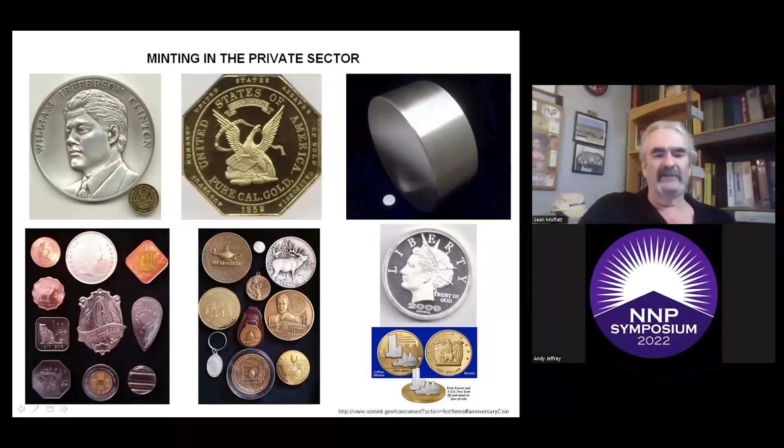Let's go back and take a look at minting. Minting is basically melting and smashing of metal, but under controlled circumstances you can produce items to facilitate commerce, which are your circulating coins. You have surrogate items for commerce, which are your tokens and jetons. You have items to store wealth, which are your bullion rounds and bars, and objects of art, honor, commemoratives, which are your medals and medallions, as well as pretty much anything else that can be made by the minting process.

In about 2600 years, since coins were first minted in ancient Lydia, the basic process has not changed. What has changed is the technology has improved, the processes to where we get consistent alloy sizes and quality, and that's on your good days. But since the very beginning of minting, bad day events happen every day in every mint all around the world.

So let's start at the very beginning, coin material. The modern coin materials follow certain processes before they can be made into blanks or planchets, for numismatically inclined. The metal elements need to be refined to pure. The pure elements are then mixed or alloyed with each other per specifications, and then they're tested to make sure they're the right composition. Then the specified metal is cast into a semi-finished usable shape, and in the end, the metal will be processed to become a finished strip.

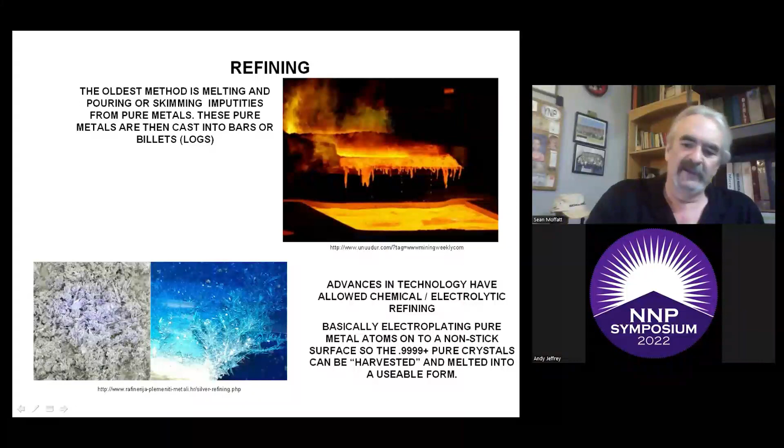So refining, the oldest method is melting and pouring or skimming off your impurities from the pure metals. These pure metals are then cast in bars or billets or logs, as you want to call them. Advances in technology have allowed chemical and electrolytic refining, basically electroplating pure metal atoms onto a nonstick surface like carbon or graphite, so that 99.99% pure crystals can be harvested and melted into a usable form.

Now, alloying is melting different types of pure elements together to create specific properties in the finished metal, and this is real important for counterfeit detecting. At least in the modern era, where we have discriminators on your vending machines and things like that that can sniff out ones that are not made with the proper materials.

Your base metals, which are copper, nickel, zinc, steel, etc., are alloyed and produced by absolute tons, megatons, we call it. Your precious metals are done in much smaller batches under much tighter quality control, but still these are produced by the tons, just not as many as your base metals.

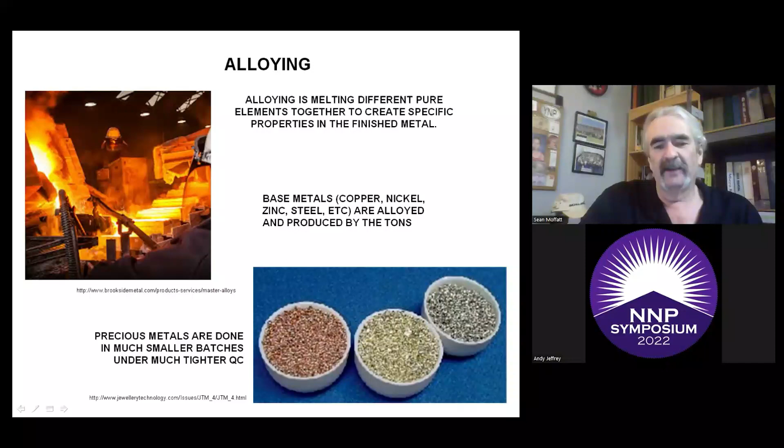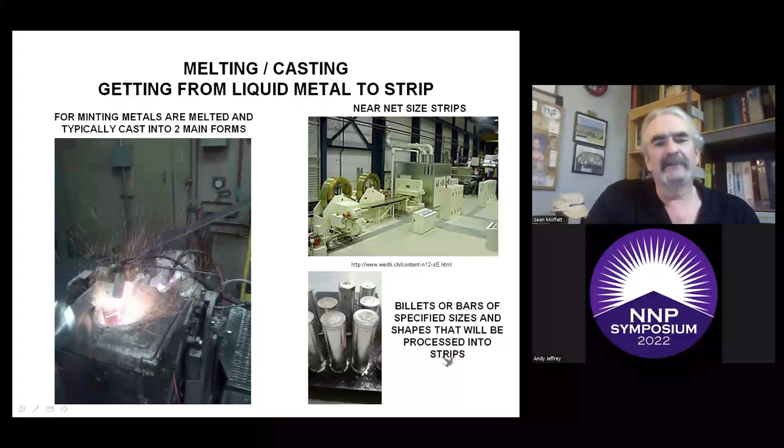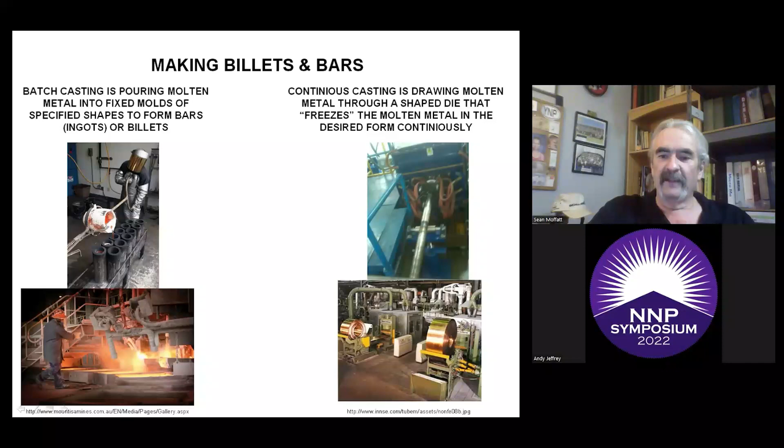So it can come out in bars, you can come out in squares, or down here you can see they come out in strips, which are then coiled up for further processing.

And a kind of newer technology I just want to touch base on is your sintered metal. It's basically, you can make near net shaped blanks, which are close to the final shape of the coin or the medal that you're making. And so this allows for a process that's called smart minting. It allows for really high relief and just odd shapes to be minted.

A pre-weighed amount of the metal powder is mixed with binders to make the powder stick together. That powder is put into a forming die and is compressed and formed into a part that is then heated, and that causes the binders to burn off. Then the solid pure metal, which is near the net shape of the finished part, is left and ready for polishing and other processing before coining. We'll touch on this process a little bit later.

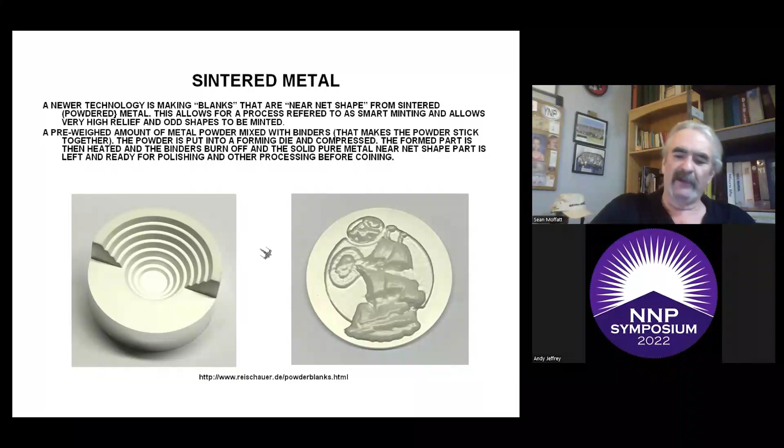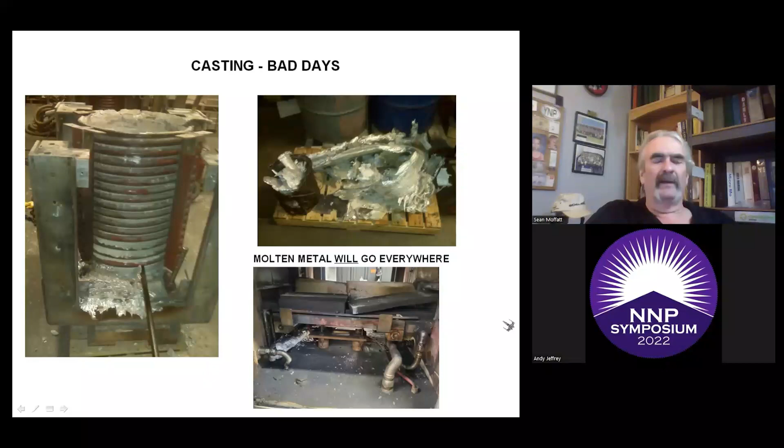And this one here is a bar casting machine that had a train wreck on the inside. You can't really see it well, but down under here, when the mold broke inside the heating chamber, all the metal just poured out, and you see little BBs of silver laying all over the place. So molten metal will just go, like I said, absolutely everywhere and make an awful mess.

Now we're going to go on to extrusion. Extrusion is pressing a heated billet of metal through a heated die with the desired shape and size, and the metal is typically squeezed into a strip.

So you need to think of an extrusion press as a 400+ ton Play-Doh spaghetti maker. I think y'all remember those as kids. You sit there, put the Play-Doh in the little chamber, squeeze the handle, and get little shapes of stars or moons or whatever came out. Well, the extrusion press works exactly the same way.

Extrusion is only usable on pure soft metals like your gold, silver, and aluminum. Now your coppers and nickels, they're too hard. They would work harden and you wouldn't be able to squeeze them. So here's how the whole process works.

You take a heated billet of metal. This one here is a pure silver billet, and you put it into a heated container. Then you have this big rod right here, called a stem, and you push that billet into there, and it's up against the die, which is in the front part of the machine. Then you apply your hundreds of tons worth of pressure, and it's squeezed out.

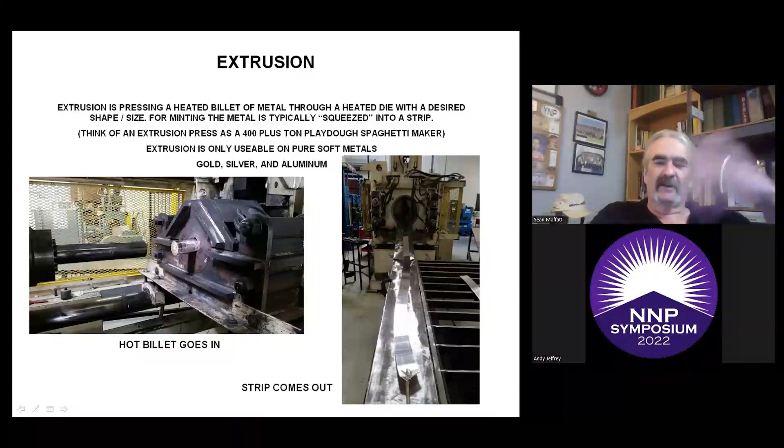That billet, which is about 12 inches long and weighs almost 500 ounces, will make about a 15 to 20 foot long strip, depending on what size you're squeezing. So when it comes out, it's all nice, pretty strip. It gets cut off in the machine, you pull it out, and you put it on a cooling table.

Now, depending on what the chunk of stuff is that came out of melting, if it's a piece of silicon carbide refractory material, or mud as they call it, it can actually damage the die, and that will leave a big line or a strip all the way down your strips, so you just waste that entire strip. It has to be melted. And if you don't waste it and send it through the process, that line or whatever the defect is can show up on your finished coins.

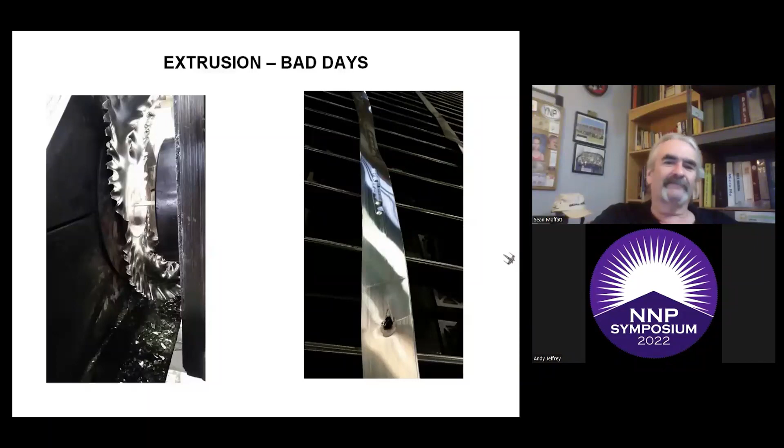Now we're going to move into rolling. Once you have your basic strips, either from the continuous caster and coils, or if you extruded them, you get them rolled down to the right thickness.

You're passing your strip through a pair of rolls that are turning, and what you're doing is reducing the thickness of your strip. Interestingly enough, the strip doesn't really get wider, it just gets longer. So you can have a 5-foot piece of strip, and if you're going to reduce it down 50%, that strip's going to end up being almost 10 feet long by the time you're done.

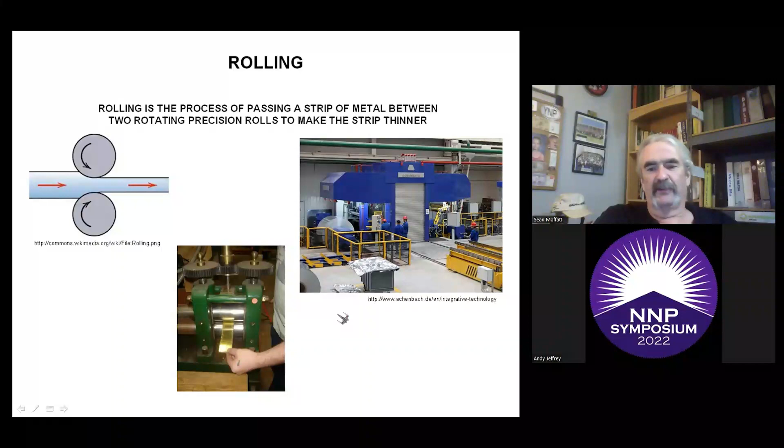Now, these rolling mills come in many different shapes and sizes. Here's basically a little bench top model, and here's just a big massive rolling mill for doing large pieces of strip. Now, another form of rolling is called cladding, where you take several strips and feed them through a cladding rolling mill, and they're all squeezed together to make a single strip.

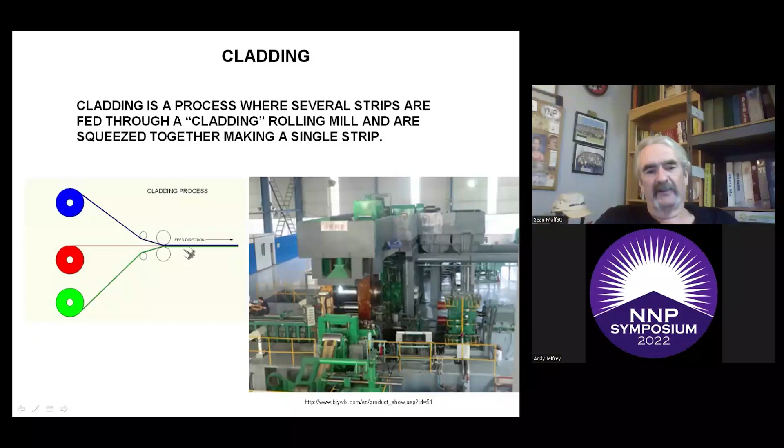So if you look at a brand new US quarter and look at the edge of it, it has a copper center, but the surfaces are both the copper-nickel silver color. So if you look here, these will both be the copper-nickel thin layers, and this here's your copper center layer.

Hey, Sean. Oh, I gotta go. There's all kinds of wrecks going on here.

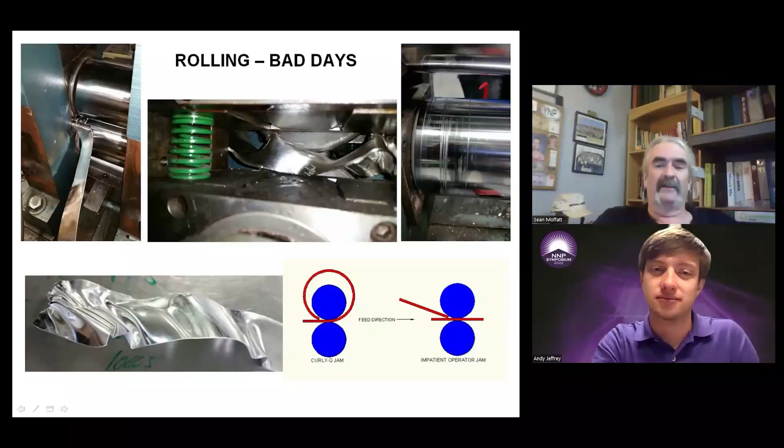You basically turn it into a piece of ribbon candy, folding up on itself and making a mess. And they get jammed up. The operator didn't feed this one in straight and it went sideways going in there. You see the mess it got into. We have to pull the whole mill apart to get this cleaned out.

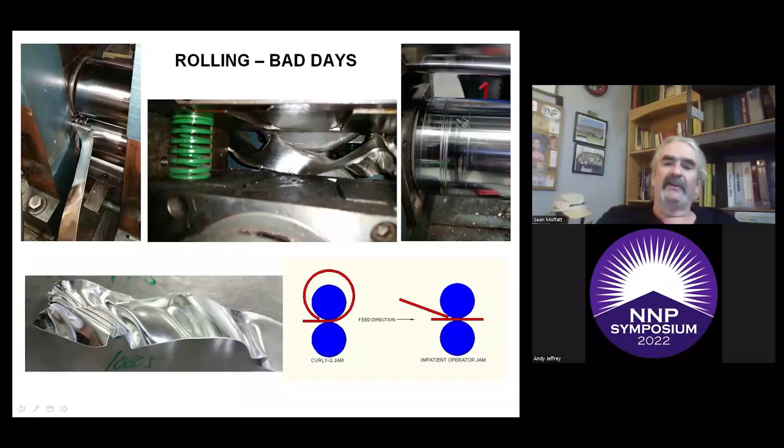And then if you have damage on your rolls, feed something in, it jams up, there's something on your strip, like garbage stuck in it from when you cast the strip, it can sit there and damage the roll. These two rolls have to be taken out, re-ground down, get rid of all these grooves, and repolished. If you ran strip through this with these grooves on here, that groove is going to be on your strip, and if you didn't take care of it, it's going to end up on your finished coin.

And just the same way, if you get a piece of schmutz or yuck that lands on your roll and you go around, it's going to sit there and squeeze an image of that garbage into your strip. Now interestingly, it applies Murphy's Law when you do this, and that piece of yuck won't stick to the strip.

We also have different types of jams which can cause damage to your rolls and rolling mills. I call this one a curly Q jam, where the strip kind of comes up and comes around, goes back in, and feeds back on top of itself. Fortunately, a lot of rolling mills have overload clutches or shear pins on the drives, and when that happens, those blow up, and you don't actually break your rolls or the shafts on the rolls.

But it does happen. And then this one here I like to call the impatient operator jam, where the operator's not paying attention and feeds the next strip in too fast on top of the previous strip, and boom, then you blow up your rolling mill again.

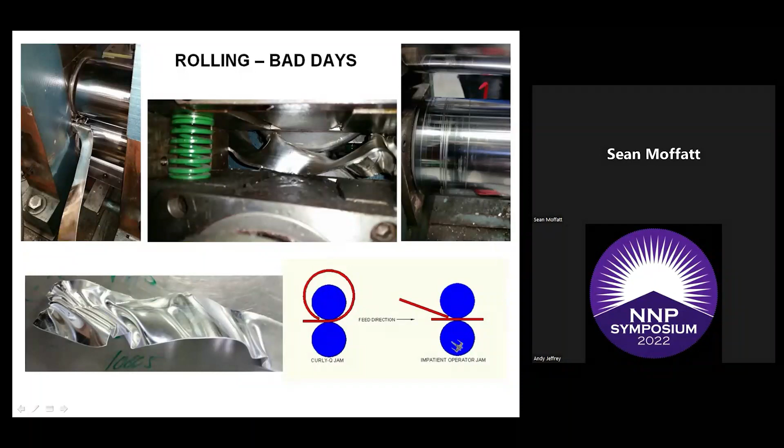So after rolling, we have other strip processing that can be done. We can have annealing if we need to soften the strip, because the rolling of the strip work hardens it. We have slitting. Strips are normally produced like 24-inch or 48-inch wide strips, and if you need it to fit into a die set to make blanks, it only needs a 3-inch wide strip. Well, the strips are slit down to the proper size that you need, and there's also all kinds of cleaning and coiling up that needs to be done with the strips as well.

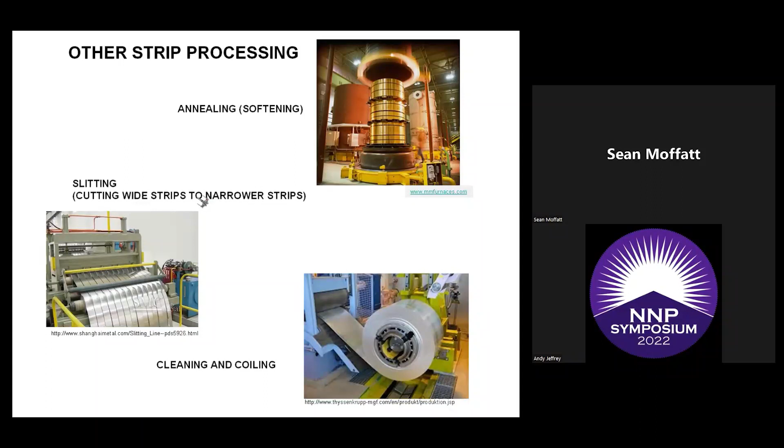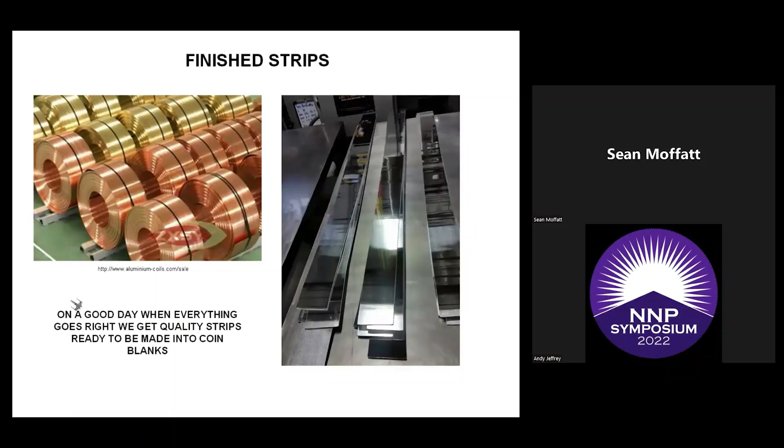So when we're all done, we have nice finished strips that are ready to be made into coin blanks. Here you have your base metals, all in coils, ready for automatic feeding through machines. Over here we have some nice finished polished silver strips ready to be made into those, probably for 1-ounce rounds. So on a good day, when everything goes right, we get good quality strips that are ready to be made into coin blanks.

Now, strips on the bad days. We've seen there are many processes to get strips ready to go, so we're going to look at some of the things that go wrong with strip processing. One of the banes of the blanking press operator are cambered and crown strips.

Camber occurs when one edge of the material is longer than the other, and it's most noticeable in narrow materials. The material curves off to one side in one direction, and it can even snake back and forth. If you were to take a strip that had a bad camber in it and started laying it out on the ground, like out in the parking lot, and uncoil the thing, it will eventually go around in a big circle.

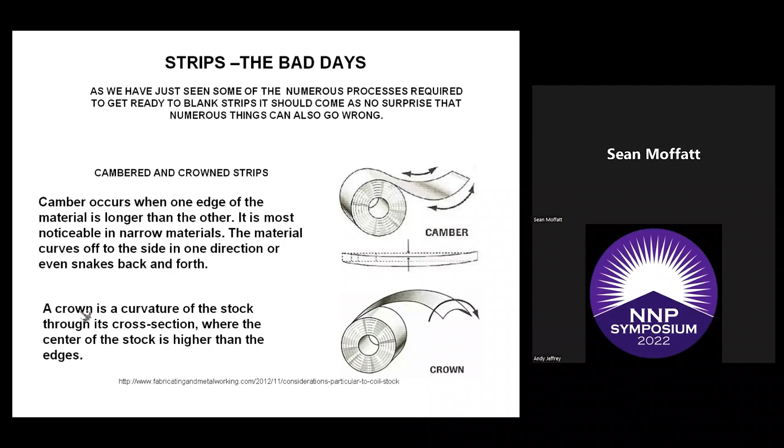And for a crown, there's a curvature in the stock that makes it thicker in the middle, for whatever reason, and that curve makes it tight to fit. We're going to discuss how this affects things later. You won't see this on a coin, but it can cause other problems later on, which can affect what the coin looks like.

We're going to go back to another bad day issue: we have laminations and bubbles. As was shown during extruding, when we had bubbles in the strip, those bubbles aren't noticed, and you sit there and further process it. The impurities in the metal can cause problems with the metal adhering, and the metal starts peeling apart.

As you can see right here in some of these brass blanks that were made, the metal just peels right apart. Here's a wonderful Mexico 50 centavos, where the eagle's wing pulled up. I put that string in there just so you can see the separation.

And here's an old German 10 pfennigs, a zinc unit that had impurities in it, and it all bubbled to the surface after the coin was made. So many times laminations, you won't be able to see them until further processing, when there are impurities underneath the surface. Now we're going to move on to blanking.

Blanking is a process where the strip is passed through a blanking tool. The tool has a plate known as a die with a hole or holes in it. It also has a punch or punches to match the number of holes in the die, just very slightly smaller than the hole in the die.

The strip is placed between the die and the punch, and the punch is then forced through the strip, punching a blank out of the strip. The strip is now stuck on the punch, so a stripper is used to pull the strip off the punch as the punch retreats from piercing the hole.

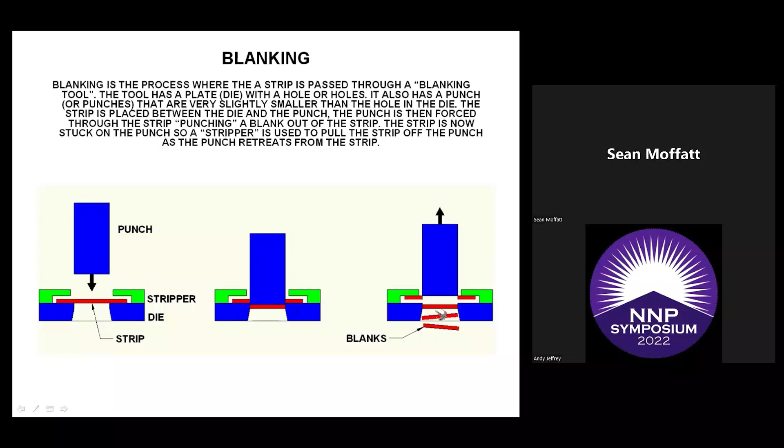So you can see right here we have our punch, and the strip is in between the punch and the die right here at the bottom. The punch comes down, it knocks out a piece of the strip into the die, which holds it there. Then as the punch retreats, it pulls the strip off of the punch via the stripper. As you keep piling up blanks down in the bottom of the die, they all start falling out and the blanks come out of the press.

There are many different ways to make blanks, many types you can make. I'm going to start with the very basic here. This is called a one-up strip, where you have one punch and one die, and you just make one blank at a time. You see how nice and tight, just a nice long strip. Whenever you want to have all the material as close as you can to the holes, you get the maximum amount of yield out of the strip you're using, so you have the minimal amount of scrap. This is a one-up strip.

This here is a two-up blanking tool, and the strip is pulled back out, so you can see how nice and tight all the holes are in the strip. We're punching this hole and this hole at the same time.

You can tell by the orientation of the punches and the holes in the stripper. This is a two-up strip, makes two blanks at a time. This is for 10-ounce silver rounds.

Here we have a four-up strip. We're making 4 blanks at a time. And again, you want to maximize the use of your strip right here.

This here was when I took a tour of the Osaka Mint in Japan. They were making 11 blanks at a time at about 500 strokes per minute, so about 5,500 blanks a minute off their press.

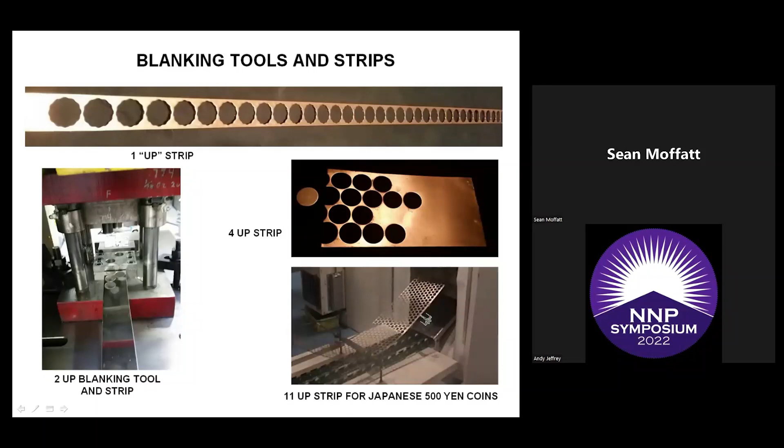With doing one-up tools, your best you can hope for is getting about a 70% yield out of your raw strip that comes in. Or if you go up from this and have many, with very thin webbing, you probably get just about an 80% yield, so you only have about 20% scrap.

So the final product of blanking is a rough blank, also known as Type 1 planchets for you numismatically minded, and we just call them unrimmed blanks most times.

I just wanted to show on the edge of the blank, you can see the impression occurring here from where the punch comes down and hits metal. And as the metal starts being pushed out of the strip, first the elasticity of the strip just kind of stretches, and that's where you get this shiny area down here around the bottom.

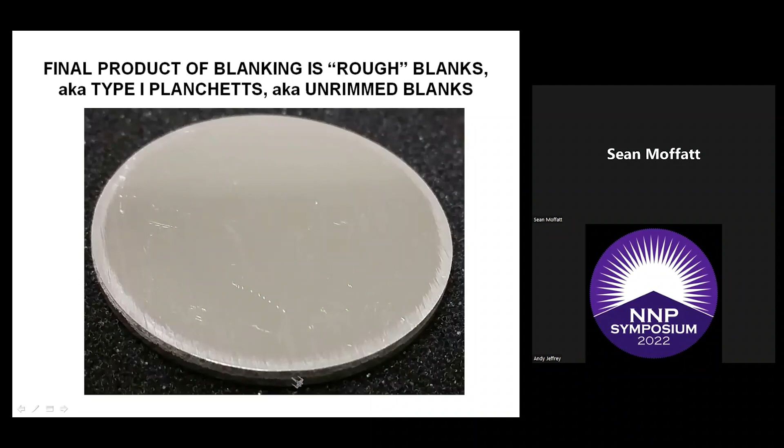But then once the pressure of the punch passes the yield strength of the material, it fractures and leaves this really rough edge all the way around. That's where it breaks, and that's where the blank gets knocked out of the strip completely.

Let's go talk blanking on the bad days. We're going to start with clips. Now, clips come from either the strip not feeding correctly in the blanking tool, or blanks getting back into the blanking tool, or running out of strip without stopping the press. So there's 3 main types of clips that we have.

You have an eclipsed clip, or what we refer to as the Pac-Man blanks. You have an elliptic clip, or a football blank. And then you have an end of strip, or what's known as a straight edge clip, which depending on the condition of the strip, it may not be straight edge, it may be all jaggedy. Whatever it is, it's the end of the strip, and you can't punch out a full blank.

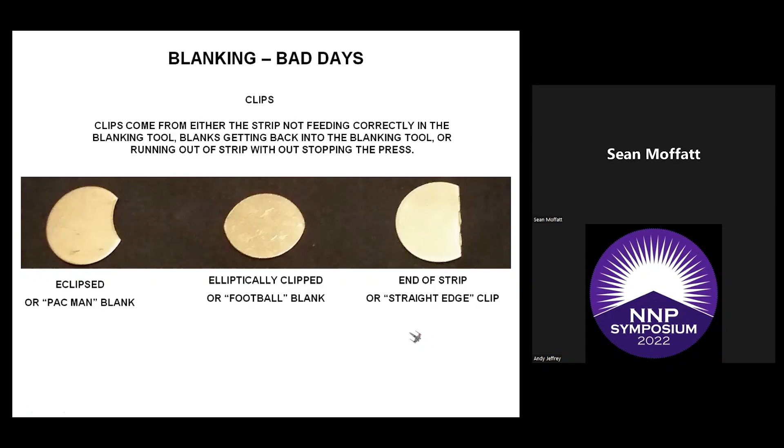Now, what may cause the strips not to feed is when we talked a little while ago about the cambered and the crown strips. When you set up a strip to feed through a blanking press, you want it to be nice and straight. It has to come off the decoiler and through a straightener, then through the feeding device on the press, and then it goes in to blank. If the strip is nice and straight, it'll just slide through there really easily. You put a bend in that strip, or a crown where it's thicker than it should be, and it's going to hang up in your blanking tool.

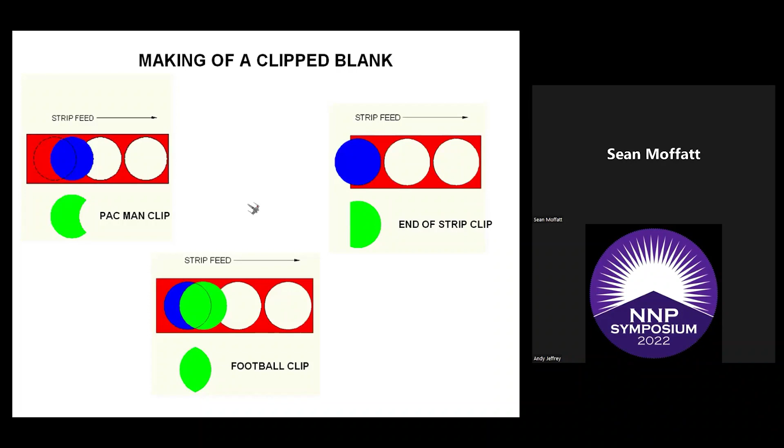Now some of you are thinking, this is really cool, but how do you get clip blanks with more than one clip on it? Well, I'm glad you asked, because here we go to the next page: multi-punch tools can produce multiple clip blanks.

When you punch out the blank, those little chips will turn into burrs on the outside edge. You can resharpen the punch and make those go away. If the burrs are small enough, they'll be taken out through some of the next processes, rimming or coining or whatever it is. But if you have rather large burrs, they will not go away, and there'll be little sharp edges on the sides of your finished coins.

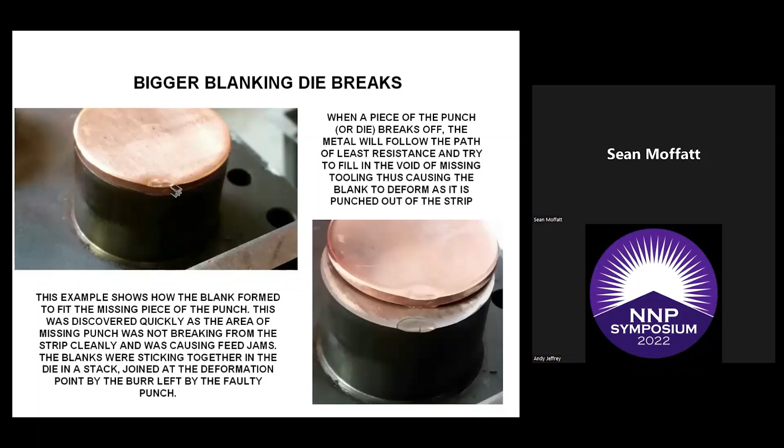A lot of times they start sticking to each other because the burrs just kind of stick to each other, and you try to push them out and start jamming up in the blanking press, causing all kinds of problems. If that was to make it through the rest of the system, through rimming and the coining, you would have a kind of goofy looking edge on the coin right where that break was, and it would be noticeable.

All right, now we're going to move on to upsetting and rimming. Rimming is the process of applying pressure on the outer edge of a blank, reducing the diameter slightly while shaping the edge of the blank.

So here's a Columbia high-speed rimming machine. They go around this bowl and come through here with the rimming wheel, and it just spits them out. You can do a 55-gallon drum of blanks in about 40 minutes or so. So just for the process, you have a big spinning wheel right here.

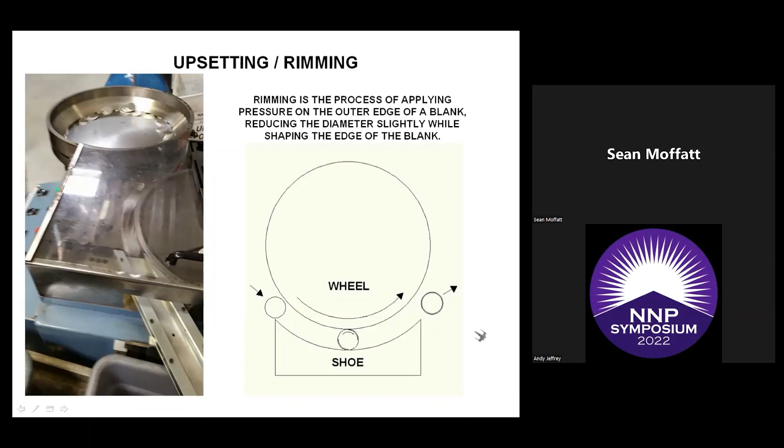It has a groove in it. You have what's known as a rim shoe, and the blank gets introduced over here. It spins around as it goes through, and it gets spit out the other side—quick and simple. And there are many different types of rim shapes that you can put on your blanks.

You have flats with angles—that's basically how U.S. coins are made. Some of the commemorative issues, like 90% silver dollars, have a double angle out here instead of just a single one. You also have radiuses. A lot of European coins use the radius edges instead of the flats or the angles.

You can have a grooved or bimetal lock rim that can be put on there with a rimming machine. I think the 2 euro cent has the groove on the edge, or the center pieces of your bimetal coins will have this. So when it's coined, the metal from the ring will flow in there and lock the 2 pieces together.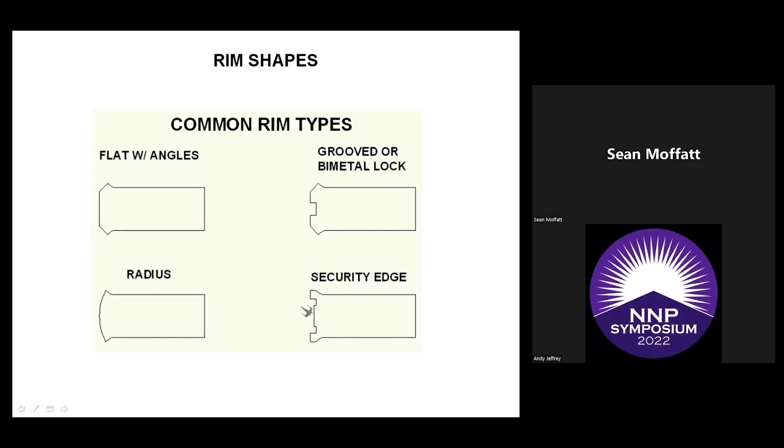Or you can have a security edge, which is something like the Indian 1 rupee. They'll sit there and have this edge that has design in the center. The design is put on in a rimming machine.

Now we're going to go into edge marking. Edge marking machines apply incused lettering and images onto the edge of the coins or blanks. The U.S. Mint puts the edge marking on the dollar coins after the coin is made, but pretty much everybody else puts the edge marking on before the coin is made.

So you can see many different designs over here that can be done. The reeding is put on in the coin press, but all the lettering, design, and pattern work is put on in a rimming or edge marking machine.

This here's a Schuler RS50 edge marking machine, designed specifically to edge mark coin blanks. Now, with proper modifications, edge marking can be done in a regular rimming machine, and rimming can be done in an edge marking machine. I've done both.

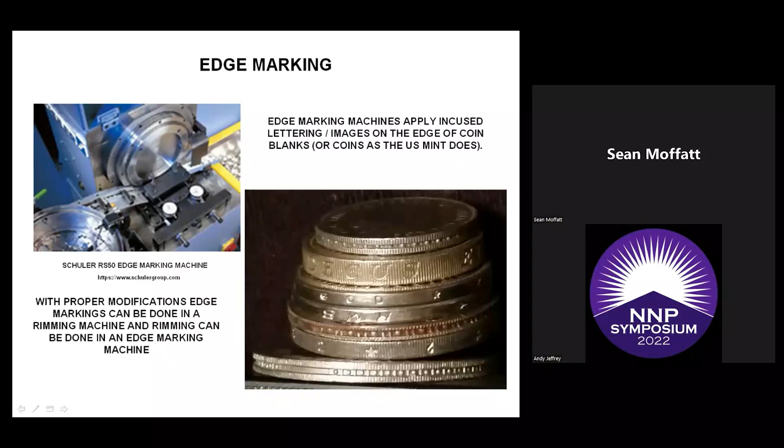So the process after rimming, you get your rimmed or upset blanks, also known as your type 2 planchets. Remember, here's the type 1 unrimmed blank right here. We have the break on the edge and the shiny spot, and it shows the punch marks on it.

And then you come over here, the rim blank, that helps hide all that garbage on the side of the coin. It kind of breaks up the surface so you don't see where the punch was pushing it through the strip anymore. So we have our type 1 planchet, the unrimmed blank, and the type 2 with the rim on it. Now, rimming has three main purposes.

The raised edge will protect the face of the blank through the remaining processes. So instead of the blank sliding along its entire face, it's only sliding along on the bumps of the rim that was put on it. That also reduces friction and helps them slide through the equipment faster and easier.

Rimming also assists with the filling of the deepest part of the coin, which is your border. You want your border to be deeper than the image on your coin, so the face of the coins don't wear. And rimming also helps keep the blanks from sticking together during cleaning and polishing processes, because it adds a little air pocket in there and keeps the blanks from sticking together.

Now, rimming on your bad days. You can see here we had a whole train wreck in the rimming shoe, and all these here are fused together, and we have to take the thing apart and get all the pieces out of there. I've seen jams so bad it'll blow into the rim shoe, just snap it clean off.

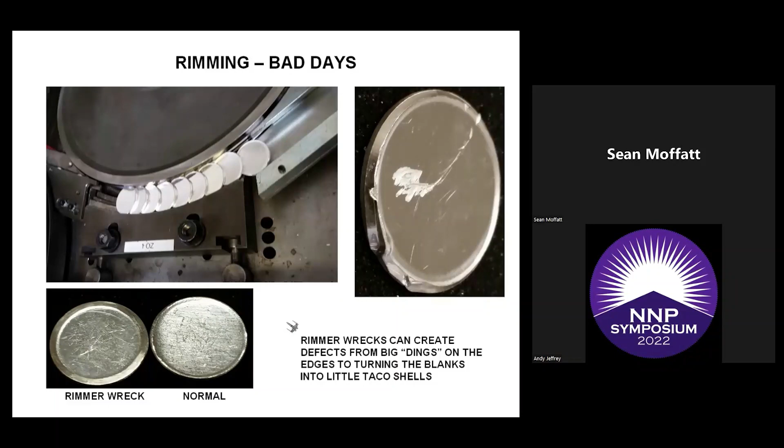Now, once we have our blanks rimmed, we're going to go on to annealing. Annealing is a process where coin material is heated to soften the metal. The rolling of the strip has work-hardened it as it went through the rolling mills, and the material's gotten hard, so now it's too hard to easily coin.

Depending on the process, you can either anneal your strips or the blanks can be annealed, depending on what you want. Depending on the alloy of the coin material, specific mixtures of an inert or what's known as a reducing gas must be added to the annealing furnace's internal atmosphere to protect the metal inside by preventing oxidation and/or creating a bright finish on the metal.

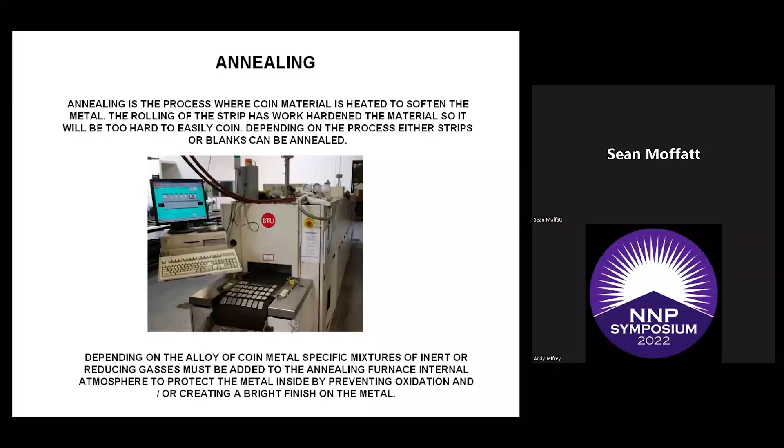Most commonly what's used is a nitrogen and hydrogen mix. The nitrogen pushes out any of the oxygen and the hydrogen burns off any that might be left in there, and it also helps create a bright finish on the blanks or the strips as they come out of the annealing furnace. But we have problems with annealing as well.

Laminations, which are hidden, oftentimes will show up when you send the product through the annealing furnace, as it heats it up and the trapped gases or impurities below the surface heat up and expand. Then they start showing up as bubbles.

If you don't have your gas mixture right going through there, you can have oxidation. That's when the coin material is exposed to oxygen at the high temperatures required for annealing.

Now we're going to go on to washing, polishing, and burnishing. Burnishing is a process of polishing the coin blanks, and three things are needed to burnish coin blanks.

We need media, which is the shot or something that's going to go in there and come in contact and rub all over the blanks that are in the burnishing.

Then you're going to need a compound, also known as soap, to remove oils and dirt and brighten the metal. Most of your compounds are slightly acidic, so it kind of eats away any garbage that might be on the face of the metal and brightens them up.

And a machine—you're also going to need a machine to generate the movement of the blanks, the media, and the compound all together in a specific way to ensure you always get a consistent finish.

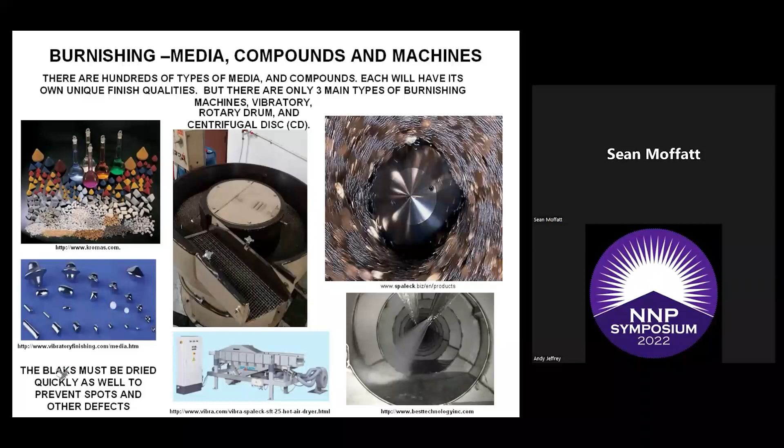And yes, we do have problems in burnishing as well. As I mentioned earlier, we put the rims on the round coins to keep them from sticking together in burnishing. Well, you can't really put rims on an oblong coin. Sure, there's a machine that has multi-segments for the shoe, and they can put rims on odd-shaped stuff, but most people don't because those machines are really expensive.

So you see right here, this blank, stuck in burnishing process. You have a nice polished little section out here, but then where the other blank was stuck to it, guess what? It never saw the polishing media or the compound or anything, so it came out nice and dull.

And over here, the thin blanks, they get stuck in a burnishing bowl, especially like a vibratory bowl. They get stuck down in the corner. They'll get pounded to the shape of the bowl that's in there. Most of your burnishing bowls have curved walls on them to keep the blanks from sticking to the sides. So what happens is this thing got stuck down at the bottom somewhere, and the mass of the media just kept pounding away on it. It just kind of turned it into a little cereal bowl there.

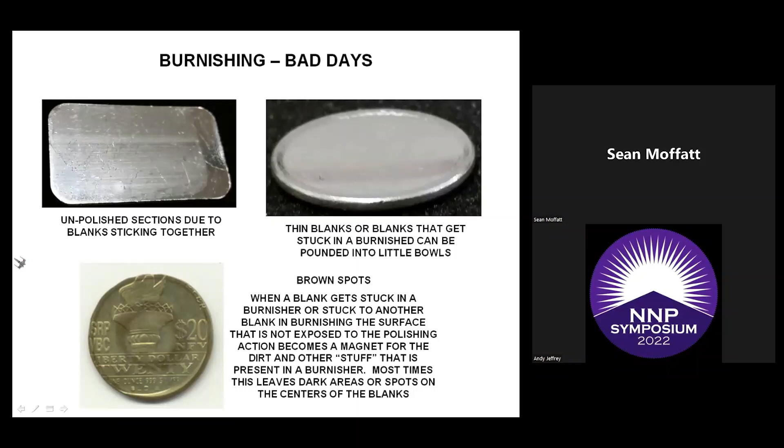And then also brown spots. You can have a blank that will get caught in a little corner and it won't move. If it gets another blank stuck on top of it, it'll just sit there in this area that's not really getting any media circulation because it's being blocked by the edge of the bowl or another blank on top of it. It'll just become a magnet for all the dirt that's in the bowl and make this nasty looking brown spot, or whatever color the garbage is on the blank, and then it'll come out of there looking absolutely terrible. And yes, it will get through the rest of the coining system unless you catch it.

Now we're going to go on to inspection. People spend a lot of money on inspection equipment to sort out the good blanks from the bad blanks, and removing your defective blanks before they enter the coining presses prevents many, many more bad day incidents.

It's all recycled. Now, probably about the last 20, 25 years, they've come out with these visual inspection machines, which have a camera in there, and the material goes flying through this machine single file at a very high rate of speed.

Up to 200,000 individual blanks per hour go through these machines. If the camera detects a clipped blank, garbage on the face of the blank, or anything that's not right, it'll flick that blank out as it flies through the machine. The problem is it only looks at one side of the blank, so it's only catching 50% of the imperfections on the face. With these types of machines, they don't catch any imperfections on the face of the blank at all. There's no visual inspection. It's all mechanical.

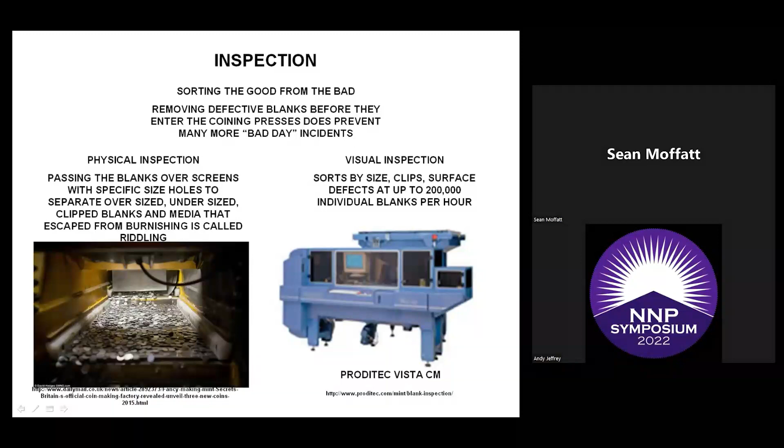Now we're going to move on into coining, starting at the very beginning, from its humble origins of manually hammered coins. Coining has always been about placing a soft piece of metal between two harder pieces of metal with an image cut into them, then applying pressure to smash the soft metal so it takes on the images of the two harder pieces. In parts of India, hammered coinage lasted into the early 1900s.

Commercially, drop hammers were used into the late 1900s, and they were actually used for making large medallions and things like that.

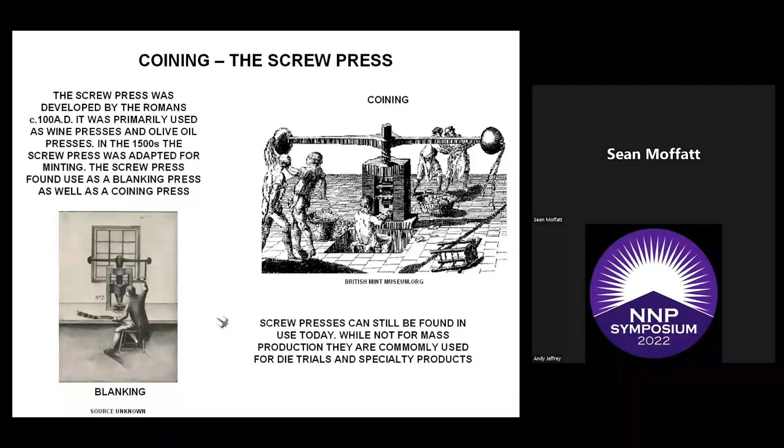Screw presses can still be found in use today, though not for mass production. They're commonly used for die trials and specialty products. In my shop today I still have a little 5-ton screw press, but that's primarily used for getting the coining tooling apart after there's a crash.

Now, coining, we're going to move into the knuckle joint press. All modern high-speed coining presses are of a knuckle joint design of one type or another. The knuckle joint press was invented by a German mechanic named Diedrich Ulhorn about 1812.

This is one of his original Ulhorn presses. This was me at the Berlin State Mint in Germany back around 2012, and I was just so happy to see one of these original presses, I had to go over and lug on it a little bit. These knuckle presses proved to be very popular, and due to their speed and reliability, their use spread quickly to mints all around the world. Over the years, numerous types of knuckle joints have been designed and developed.

This is one of my favorite mint production pictures, because I know it's a stage picture. Here is an Ulhorn press, looks exactly like that one. It migrated all the way to Costa Rica, and this picture was taken in 1923. The reason I say this is one of my favorite stage pictures is we've got the boss sitting there watching this guy run the press, but I know that guy can't be doing a whole lot because the boss is holding onto the flywheel, which needs to be spinning in order for the press to run. So, stage picture.

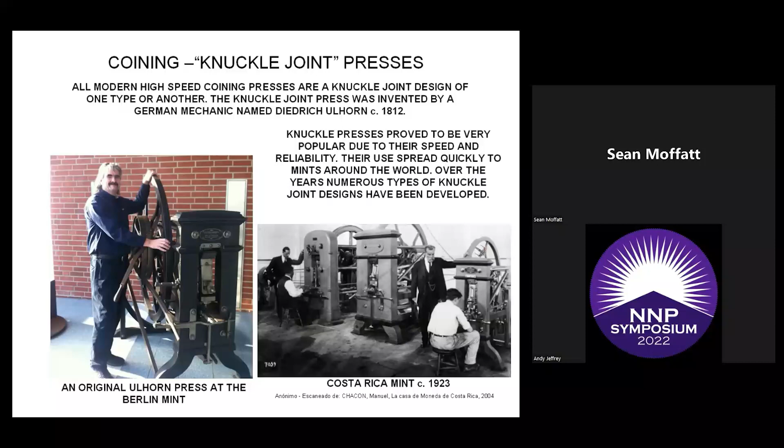So, when it comes to coining and knuckle joint presses, size matters. Being of a mechanical design, knuckle presses get very large and heavy very quickly as the tonnage rating of the press goes up.

So over here, we're going to start. This is a 120-ton Schuler horizontal press, known as an M120. It puts out 120 metric tons of force, and it weighs about 7,000 pounds. Not very big, probably about 4 feet tall, right about here.

Right here, we have a 600-ton Grabener vertically acting press. It's probably about 9 to 10 feet tall at the top, and it weighs close to 28,000 pounds. Over here, we have a 1,000-ton Minster vertically acting knuckle press, and that guy is over 20 feet tall, and it weighs close to 50 to 60,000 pounds.

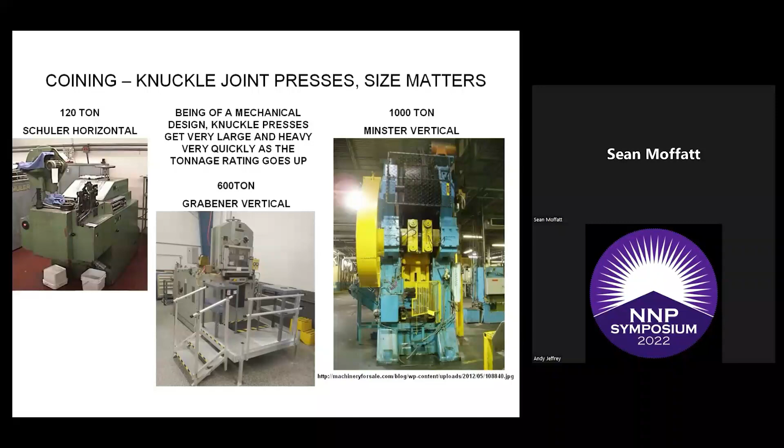So these presses get very big, very fast, and they're very expensive. Now we're going to look at how the knuckle joint actually works.

Now in minting, these lever type knuckle presses are only used in a vertical format. And your vertical presses, interesting enough, can also feed pretty much any shape of blank - they don't need to be just round.

Now the next page is going to be a short video of how a knuckle press, or how a toggle press or a lever press, actually works. I'm going to just advance to that next, so I won't talk over the video.

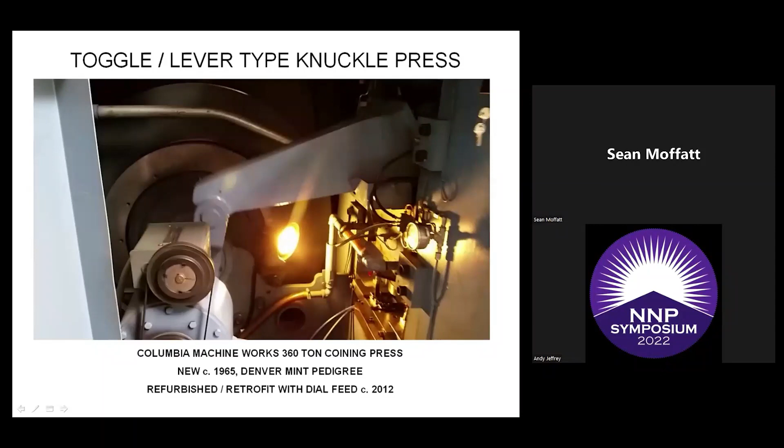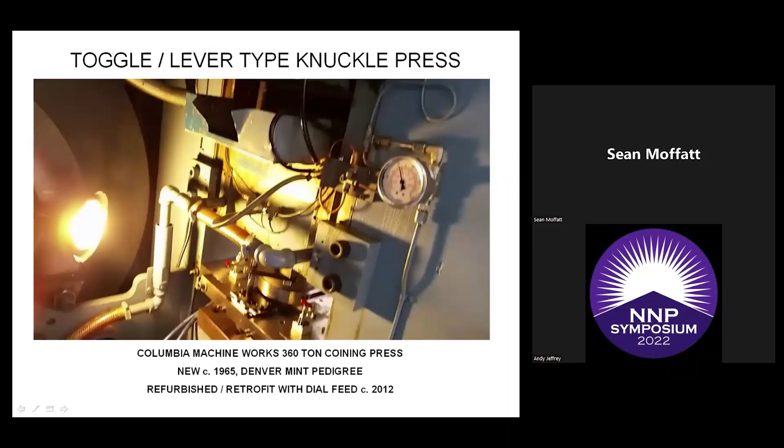Okay, so out there is a Columbia Machine Works 360-ton coining press that was new about 1965, and it still has the Denver Mint asset tag on it. It was refurbished and retrofitted with dial feed in 2012, but you can see how the draw rod on the crankshaft pulls this lever up and down, and it causes this knuckle assembly to straighten out, which causes it to go down on the coin, and then when it comes back up, it causes the knuckle to bend up again and retracts the die so it can get the blank out of the way for the next coin in the cycle.

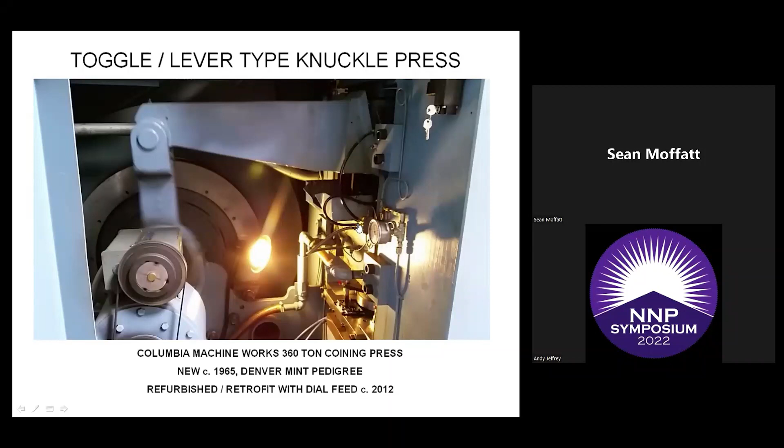When it cycles around to the bottom, it sits there and pulls the knuckle down and straightens it all out, which causes the die to move forward. Then when it goes back up, it opens up the press again.

What that does is it sits there as they both pull down at the same time. The crankshaft pulls both draw rods down at the same time, straightens out the knuckle, and you get the coining. Then when it pushes it open, since the 2 draw rods are set off about 30 degrees, it causes a wobble at the end.

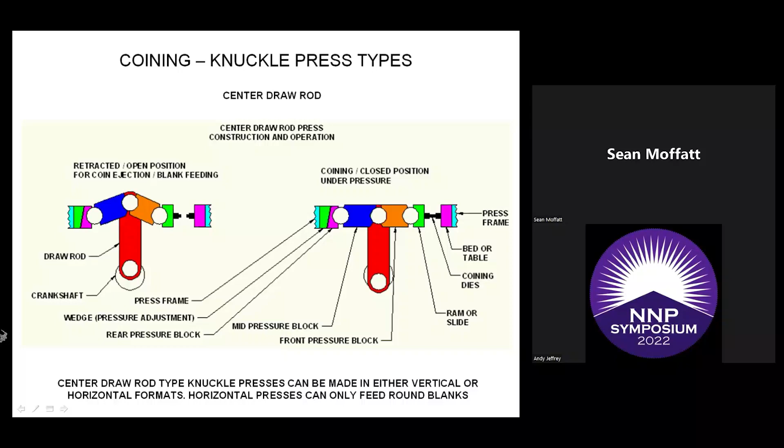The center draw rod presses can be made in either vertical or horizontal formats, but your horizontal machines can only feed round blanks. Now we're going to move on to our hydraulic presses.

Hydraulic presses can generate a huge amount of pressure in a very small area, which makes them ideal for medallion and proof coin. Hydraulic presses are not nearly as fast as knuckle type presses. At best, you can probably maybe get 20 coins a minute out of one, maybe.

But they can be readily programmed for variable pressures for each strike. The flow of the material being coined is dramatically different in hydraulic presses than in mechanical presses. In your mechanical or knuckle joint presses, the press is mechanical—the die is going to push to the same spot every time. Nothing's going to change, it keeps going to the same spot every time.

For a hydraulic press, you can program how hard you are going to hit the coin each time. So if you're making a nice proof high relief medallion or something like that, you can start with the first hit at 150 tons, the second one 200 tons, and the last one 400 tons. What that does is reduce the metal flow, which reduces the wear and tear and the striations on your dies and on the finished coin.

So these are really nice and programmable like that. But as you get into higher tonnages, the presses don't really get that much bigger like they do with the mechanical presses.

This here is an 1,100 ton Colombo press, also sold in the U.S. by CMC at the time. This press weighs less than 5,000 pounds, removed with a 5,000-pound forklift. And if you remember, the 1,000-ton knuckle press weighs much more.

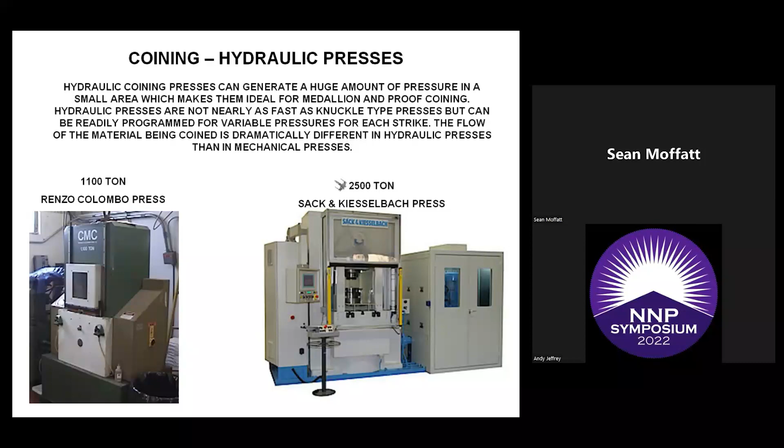So now we're going to go on to types of coining. Since the early days, there was what's known as splash coining—that's coining without a collar. You're striking a blank between the coin dies without a retaining collar, and the metal freely flows outward from the dies until it hardens or the coining pressure is removed. This method has been used since the very beginning of minting and is still in use today for high relief medallions and other specialty products.

Now we have types of coining. We're going to go into retained coining, or coining into a collar. The collar is often referred to as the third die. The coining collar was developed around 1780 by Mathew Boulton of Heaton Mint in Birmingham, England. It is basically a hardened piece of metal with a hole in the center that fits around the neck of the table side coining die. The opening in the collar centers the blank perfectly, or pretty much perfectly, on the face of the coining die. The collar also limits the outward metal flow when the blank is coined, thus allowing the coins to be produced in consistent size and shape. The coining collar was not used in the United States until 1836.

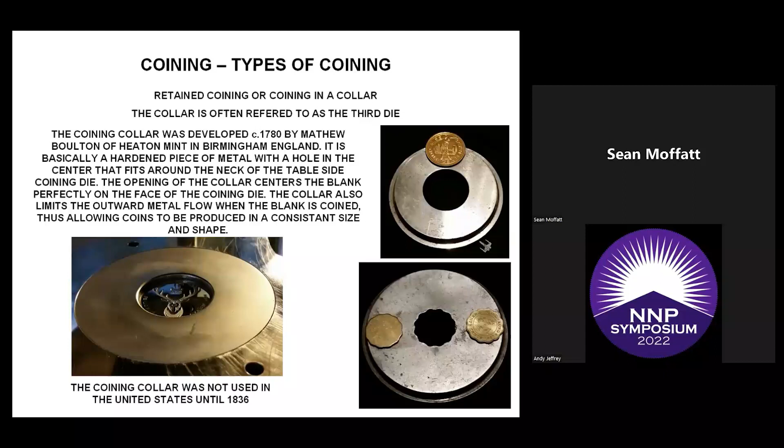And then also, if you're using goofy shapes, you have to have a collar that matches the shape. So that's how the coin comes out. The collar has to match the shape of your blank.

There are collar types. Collars can have smooth surfaces for flat edge coins. They can be machined to add reeding or facets to the edge of the coin, and these features are added to the edges of coins in the coin press as fast as the presses can strike them. So we can see right here, the reeding on the coin matches the reeding in the collar.

And these are different types. You have a smooth collar, a reeded collar with added reeds, a scallop shaped collar, and one with smaller facets that will work. Big facets don't work so well. You have to have special shaped blanks, but this one had like 36 facets around the outside, so they're small enough that the coin's going to be basically round.

Now, interestingly enough, when you coin in a reeded collar, the coin has to be pushed out straight, so your reeds all need to be straight. But Japan came up with a process using a helically reeded collar, which is slanted, for their 500 yen coins. I was always intrigued about how they could do that, and I thought they'd put it on a rimming machine or something like that, but no, they do it during coining.

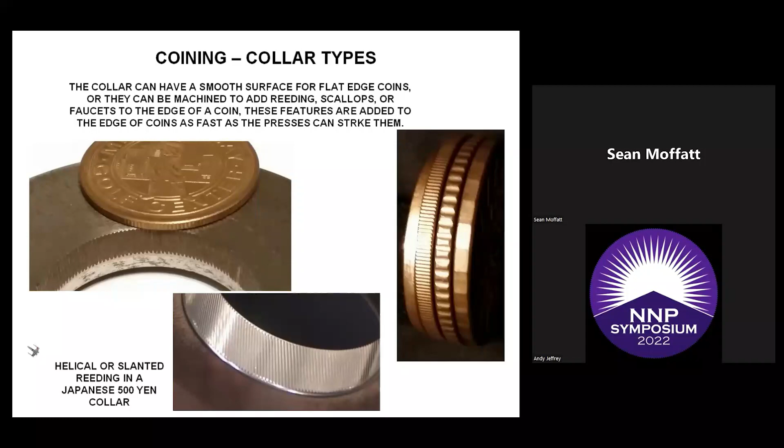This is a picture of the reeded collar I saw when I went on the factory tour there. What I noticed was that they had a large flange on the outside edge of the collar, and they had a thrust bearing on there. So then as the press went to eject the coin, the collar would actually ratchet and rotate as it pushed out past the slanted reeds. Really, really cool. And they were running those at 750 a minute. That was just absolutely amazing to do that.

Now we're going to go into segmented collars. If you want raised lettering on the edge of your coin, remember the edge mark is put on as incuse lettering, which is lettering that's pushed into the edge of the coin. But if you want raised lettering on the edge of the coin, you have to have a segmented collar that comes apart after the coin is struck.

So right here we have a picture of a segmented collar on one of the Grabener coining presses making the presidential dollars at the U.S. Mint. So you see the collar comes in 3 pieces. This here's a segmented collar from the early 1800s, and you see the text that was engraved into the segments of the collar.

When the blank is placed on the die and it goes down to be coined, the neck of the die has a big ring machined around its outside edge. There's a groove on the underneath sides of the collar segments that this ring fits into, and as the die goes down to coin the blank in the collar, it pulls down on these collar segments and closes them, holding them tight while the coin is struck.

Then when the coin is ejected, the ring on the neck of the die comes up and hits the bottom side of the face of the collar, which pops the collar loose and knocks it open. All the collar segments separate and open up just a little bit, and the coin is pushed out.

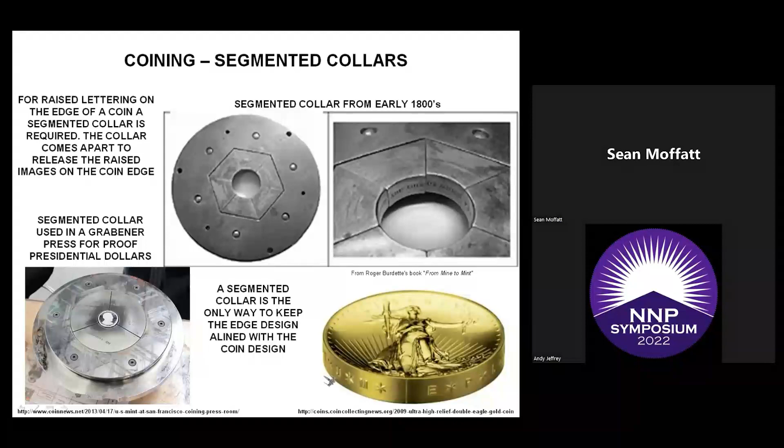So you can see right here how the lettering looks on the edge. At the seam where the collar segments come together, it will always leave a line, right here. Some creative people have placed a design element right where these separation segments are, to kind of hide that line. That's how you get the raised lettering on the edge of your coins.

Now we're going to go into how automatic blank feeding and ejecting work on coin presses. Several things have to happen in every single cycle of a coin press to successfully make a coin every time. The blank must be fed on center, which is very important, between the dies.

The blank must be struck with the appropriate pressure. The coin must be forcefully ejected from the collar, and it takes several tons worth of force, depending on the size of the coin, to get it out of the collar. Then the feeding device must remove the coin from between the dies while inserting a fresh blank. Most modern circulating coin presses do this up to 750 times a minute, so these things are flying.

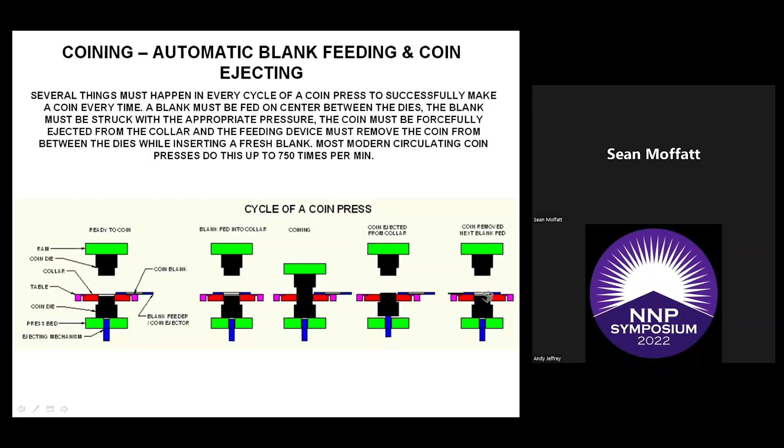Then the dies open up, and the ejector comes and pushes the blank up, which pushes the table side die up, pushing the coin out of the collar. Then your feeding device comes over, pushes the coin out from between the dies, and inserts a new blank before the next cycle starts. All of that happens really, really fast.

In coining, there are basically 5 different feeding types for putting blanks in and out of a coin press. First we have hand fed, where you reach in, place a coin between the dies, cycle the press, reach in, take the coin out, and put the next blank in.

Then we have the original high speed coining method, going all the way back to the Uhlhorn press: the feed finger type. These fingers pull back, then close and grab the blank, push it up, open, and drop it right in the center where the die is. At the same time, the end of the fingers push off the previous coin that just came off the dies and push it out the back of the machine.

We have these little grippers that grab the coins, move them up, and drop them in between the dies. Another variation typically used in hydraulic machines are little suction cups. The suction cup picks up the blank, moves over, and drops it down, because hydraulic machines aren't nearly as fast as mechanicals, and those work just fine for that too.

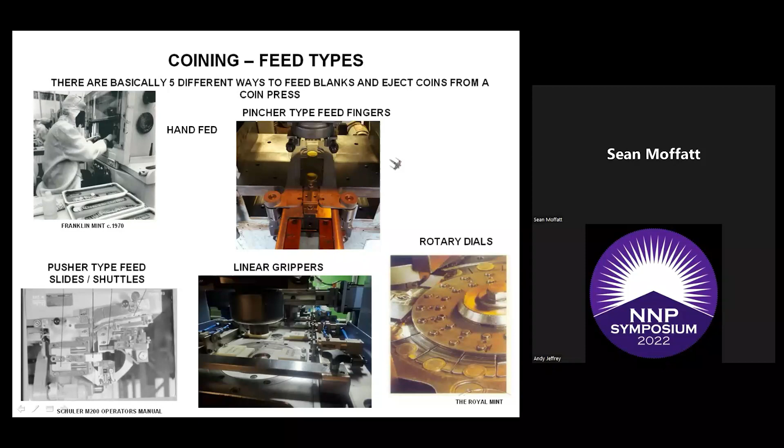So what we saw going on here: you would fill this tube up full of blanks, either from a feed bowl or feed it manually, and these fingers come back and grab the coin off the bottom of the stack, which is just an opening big enough for the thickness of the coin. They basically grip and rip out that bottom blank, push it out, and drop it into the coining collar right here. Then the coin that just got made gets pushed off by the end of the finger. I'll run that one more time.

And that's how the feed fingers work. This here was a Bliss 6K 225 coin press that was built about 1977. It came out of the U.S. Mint, where it had a dial feed setup and was making four 1-cent coins at a time. This was modified to one finger feed for 39mm silver rounds and other types of materials if you wanted.

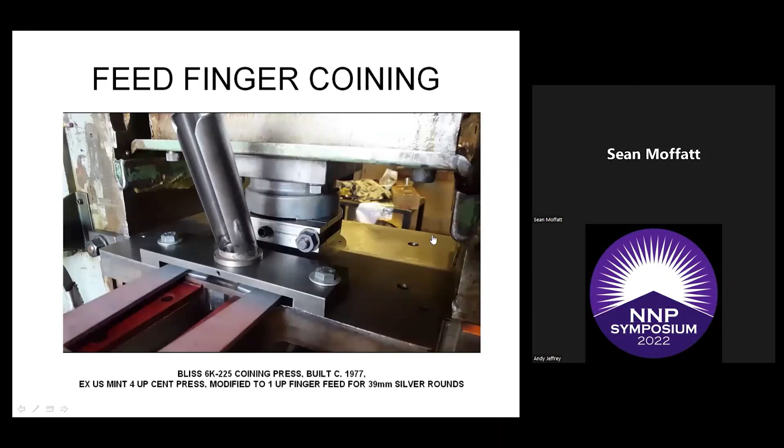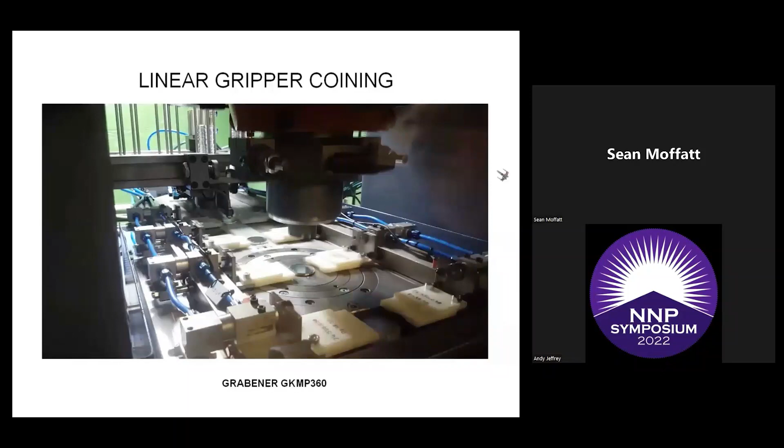Now here we have linear gripper coin. You see how the grippers come in, grab the blanks deposited back here, move it here, another one grabs the blank, moves it there, another one grabs the blank, moves it here, and then the last set of grippers up in front grab the blank and pull it out the front. There's a little conveyor belt right here that drops it onto. Now you can replace these grippers as suction cups that work on the exact same linear feed type idea.

And this press here is a Grabener GKMP360, and we have dial feed.

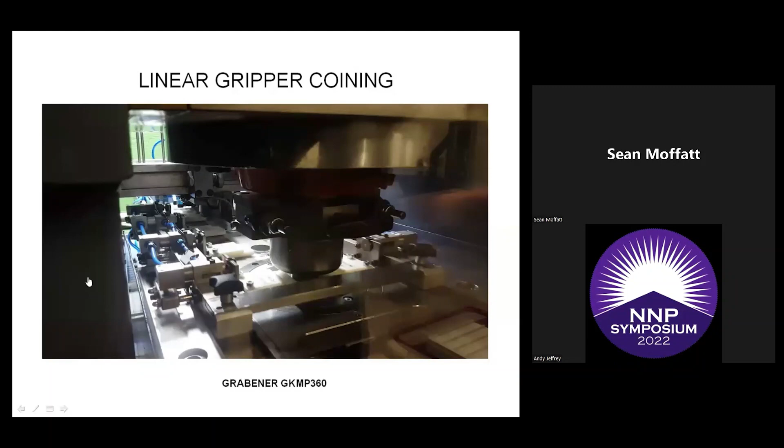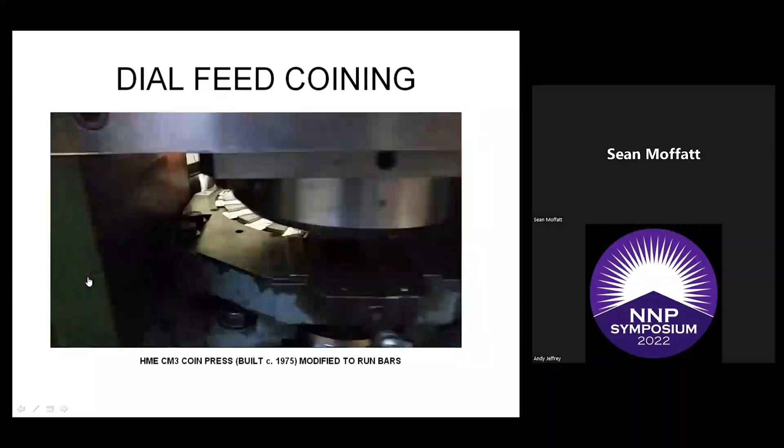So anyhow, you see the dial moves the blank in between the dies. It stays put, the dies come together, make the coin. The coin gets pushed back up into the dial feed. The dial takes it out of the way and pushes a new blank in. This was an HME CM3 coin press built about 1975-77, and this was modified to run 1-ounce silver bars.

Now we're going to go into bimetal coining. Bimetal coins are made from two or more pieces consisting of an outer ring and a center piece that are joined together.

Your blanks can be provided to the coin press in a specialized coining press, and they're coined and joined together all at the same time. Or blanks can be delivered pre-assembled to run like your standard coining presses.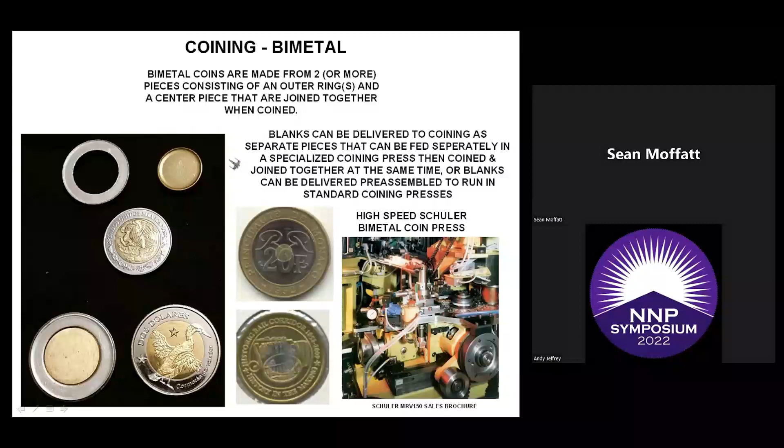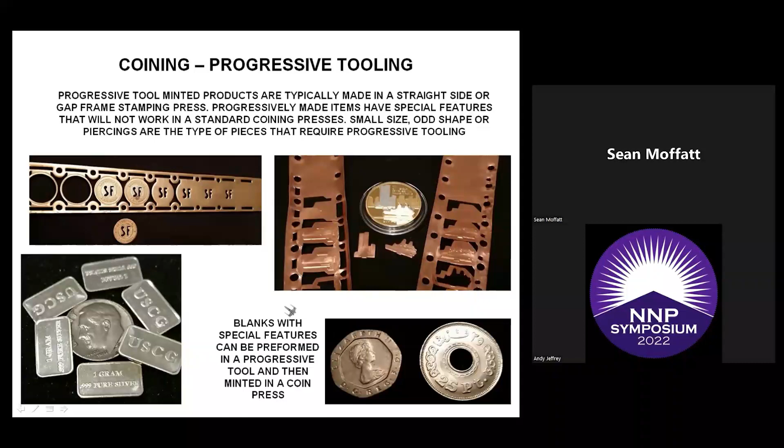Center holes are also pierced into coins that have holes, and then they're fed in - some coins already have a hole in them. So the hole has to be made into the coin blank first, and the blank is then blanked out of the strip in a progressive tool.

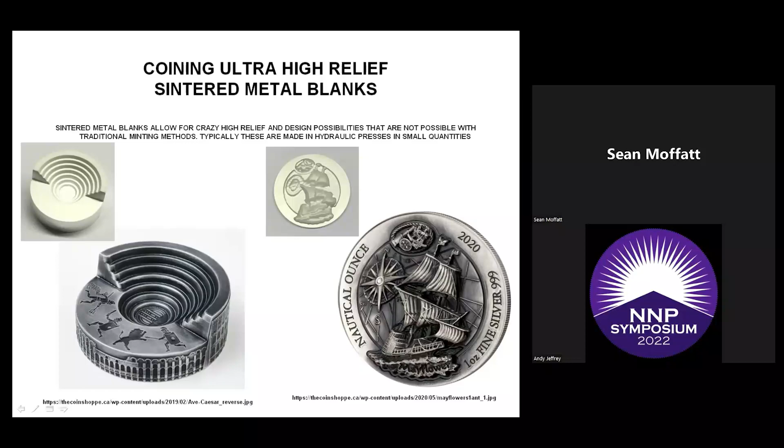Then we're going to get back to these sintered metals - you've got these ultra high relief pieces. This is kind of a newer technology, and it's just amazing the things you can do with them nowadays. Remember these blanks we looked at earlier? Well, this was the finished product from that. All you have to do is put in your images and get it to the final shape. This one here had pretty much everything ready to go, and you just coin it and put in all the details. This is really neat - I haven't actually been able to do that myself.

Then you also have die rotations. The die itself or the die holder tooling can lose its orientation - the pin breaks, or the operator didn't tighten it properly. So the dies can start spinning around while the coin is running.

Then we have other die problems: die clashes and die dings. A die clash happens when the coin press cycles without a blank between the dies, and the dies come together and actually coin each other.

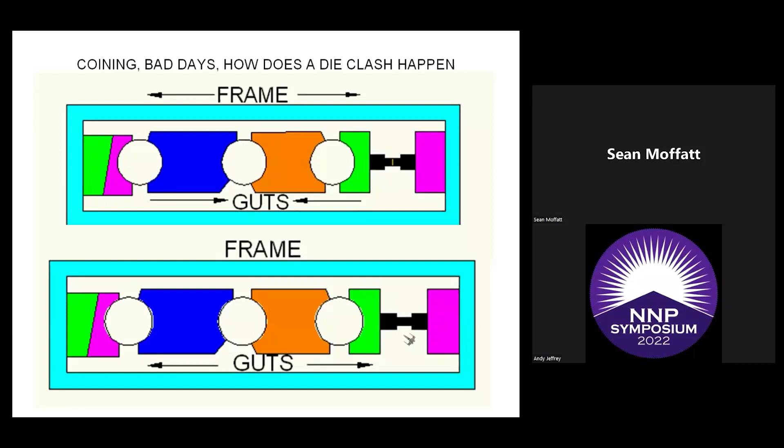And it does not take really any force to make a die clash. I could take a set of dies in my hand, a nice pretty new set of dies, and smack them together as hard as I can, and I guarantee you I will leave impressions from each die on the other one.

All right, now let's move on to more die problems. Let's start with die cracks. Cracks are caused from stresses built up from prolonged use, an over tonnage situation, or poor design, like putting a really large design with a sharp corner out near the edge. That's a stress riser and it'll crack every time.

And then we're going to have die chips and cud breaks. Pieces of a die can chip and fall off for the same reasons you get die cracks. A die chip is a piece where the piece of the die falls off, and this will leave a blob of metal on every coin struck with the chipped die.

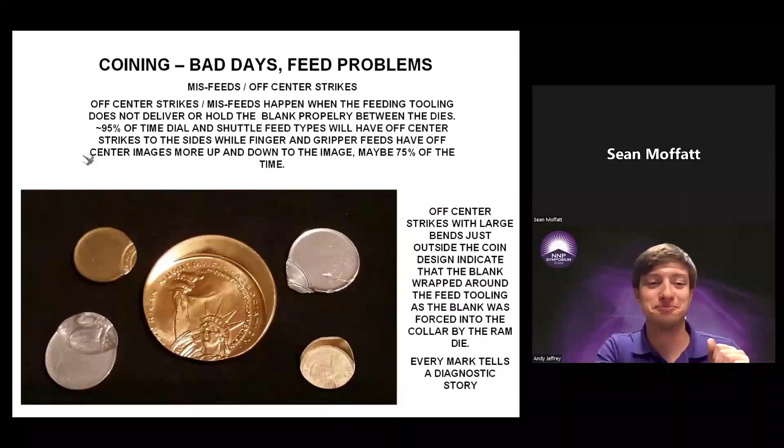And then we're going to have ejection problems where your brockage strikes pile up. So you have a partial brockage, just partially on top of each other. Then there's a full brockage, 2 coins are on top of each other, and you get a mirror image. So when a coin doesn't eject and a blank's fed on top, that coin that didn't eject now becomes the die for the next blank, so you get a mirror image.

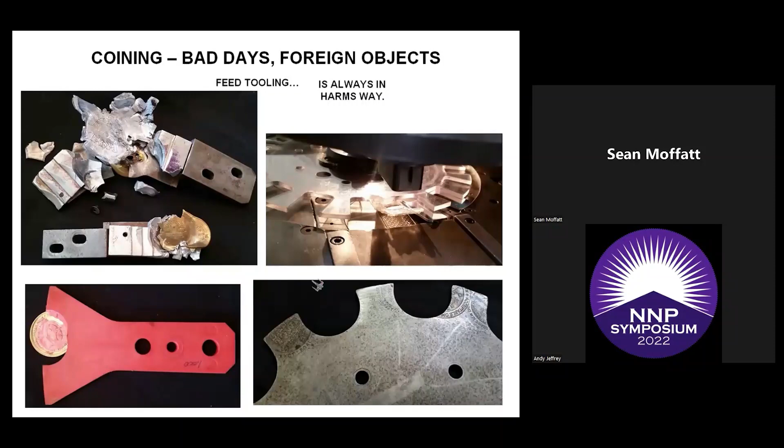And then your feed tooling, well, your feed tooling is fair game to the press. They're always getting destroyed as they come between the dies all the time. And then foreign objects—this is probably the biggest mint error ever. This is a 200-ton Schuler M200 press, came out of the Karlsruhe Mint in Germany. I bought it through Schuler when they retired it.

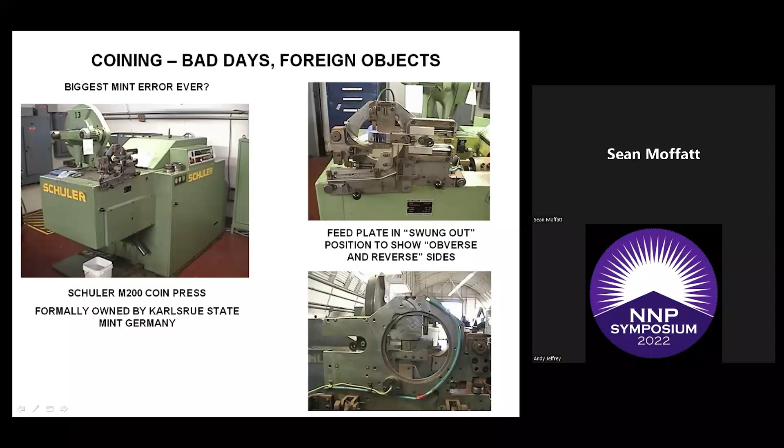And this is the feed plate. The feed plate swung out. See right here, the collar would fit in the middle, the coin blank gets held here. But I just want to point out this little circle and that little circle right there. Bang, there you go—they were making Ecuadorian 1 sucre coins. At least 2 different sensors had to be bypassed for this press to cycle. That plate was swung out like that. So yeah, I'd like to see PCGS try to slab this guy.

So anyhow, that's the end of my presentation. Thank you very much. I'm going to have a short video of how it's supposed to go and everything works.